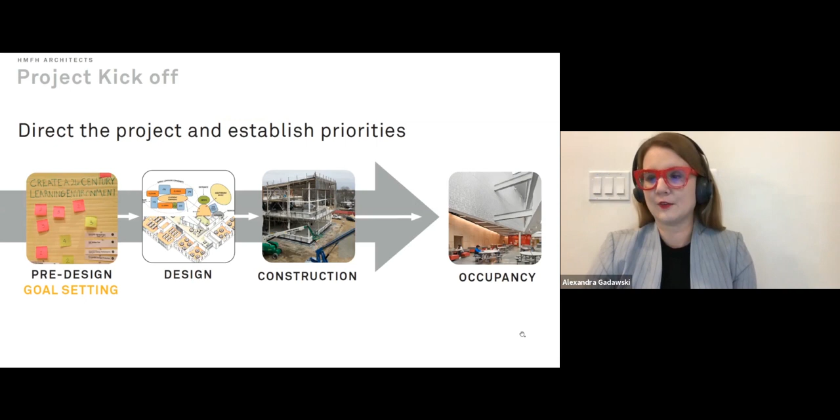So to set the stage for this, I'd like you to think about the materials that go into your building. How many hundreds or even thousands of products come together to make your building? And those could be the things that you really think about from an aesthetic lens, what kind of tile you want, what kind of wall covering, what you want the floor to look like, how do those material decisions play into your visual and aesthetic goals, and also the things that you might not really think about from a design perspective, all those adhesives and sealants and all of those little things. And it's a huge number of products.

And every time you're specifying a product, you have an opportunity to increase the sustainability and material health of your project. And I think that's really exciting. You have thousands and thousands of opportunities on every job to really make a positive impact.

I think it's also worth thinking at this point about who specifies these materials, because coming from the architecture perspective, you think, oh, I'm sort of in charge of most of what goes into the building. You've got the overarching design vision, but if you really think about it, your structural engineer is specifying a huge portion of materials. Someone who's designing the mechanical system, the electrical engineer, fire protection. So there's a huge number of material decisions going on in all disciplines. Just think about the proportion of what's going into the building and how you would really need to have all of your consultants and the whole team on board if you want to make an impact in this area.

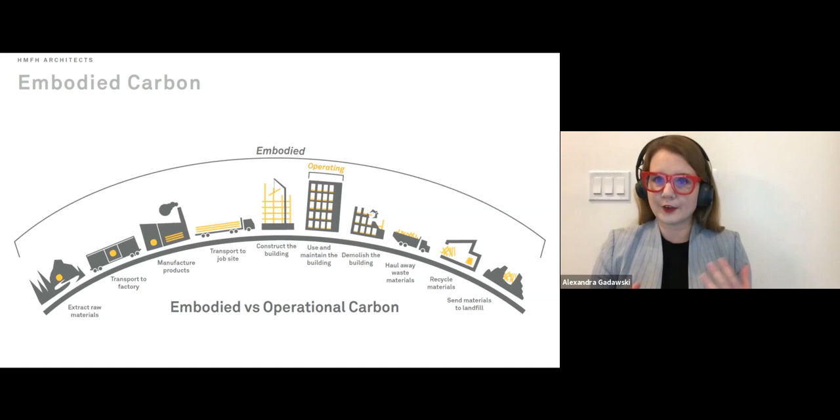This is looking at the greenhouse gas impacts of that whole process. And you often see this number as a CO2 equivalent. And if you're wanting to get more information about this, you're typically going to be looking to an EPD. So if I want to make a decision about lowering the embodied carbon of my building, that's what I'm going to be looking for. And this is a really important component of the overall carbon footprint of your building.

And I think it's important to note the embodied carbon of your building is set when the building is constructed. There's nothing you can do to lower that number over time. Now, your operational carbon, maybe in 10 years, Boston is going to have a completely renewable energy grid, fingers crossed. And our operational carbon will drop, but there's nothing we can do once we've made those material decisions to lower our embodied carbon. So it's really crucial that we're thinking about this early in the project, because moving forward, this is going to be a huge portion of our building's footprint.

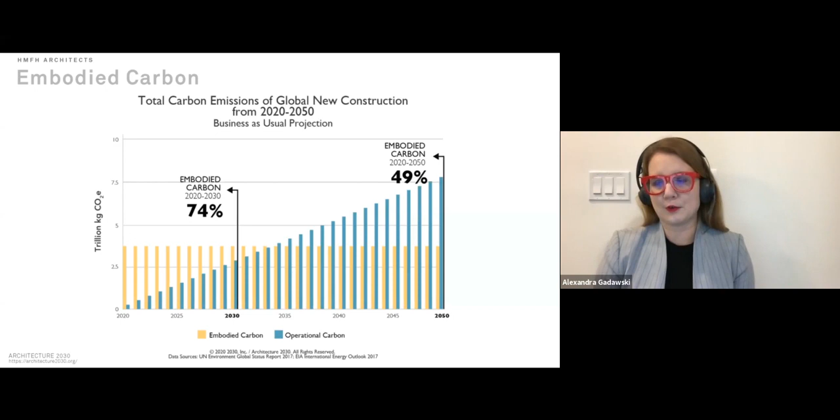So if we work really hard, we make these great material choices, say we reduce our embodied carbon impact by 10% or even 15%, we're still only touching a small portion of that pie. So if we really want to be making a big move, really taking control of the sustainability in our projects, we have to have everyone on board. And I think that's what this really highlights.

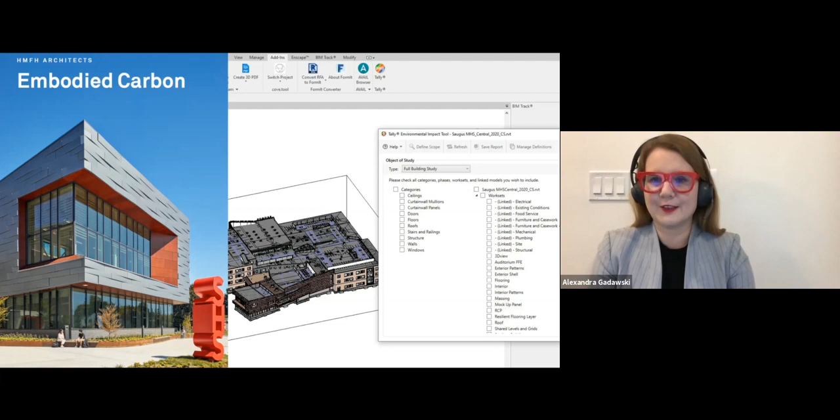So then I wanted to talk about some of the things that we're considering as we're looking at goals around embodied carbon. And those might vary by project, but I'm just going to talk about a couple here. So I think the low-hanging fruit with embodied carbon is simply to use fewer materials. To really think, if you're using, for example, a wood structure, can you design the structure in a way that's inherently beautiful and you don't feel the need to hide it? So leaving that exposed, you're not using additional wall finishes, additional ceiling finishes.

And again, it's something you're going to need to coordinate with your consultants, because if you're removing your finishes, you don't want to have massive ductwork or uncoordinated systems. So that's something that you also want to start talking about early, and a really great way to lower your embodied carbon impact.

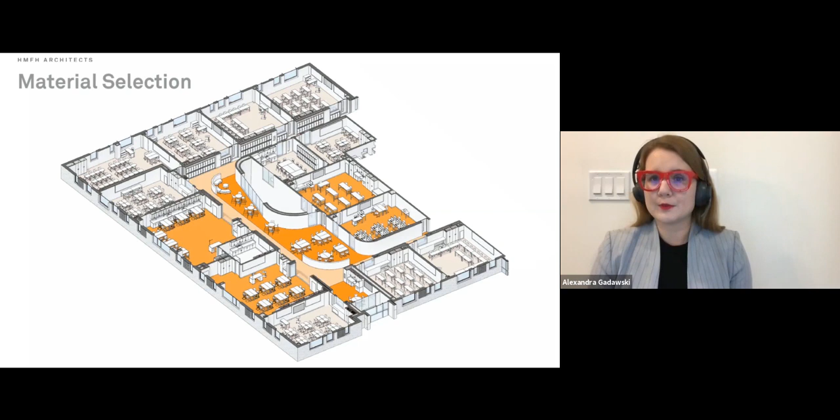So then once we've talked about using fewer materials, we really get into material selection and how we can be picking materials that have lower embodied carbon. So for this, we're really looking for products that have an EPD. Now, just having an EPD doesn't necessarily mean it's a good product. It's just telling you what the product has in it and what its impacts are. So you still need to make an evaluation between different products with EPDs.

We're getting to a point now, particularly on interior finishes, where we have a lot of options, but we're still at a point where we need to push for more transparency so that we can make those evaluations. I primarily work on public works. That means we need to specify 3 equal products. And as you move from the interior into facade systems and exterior components, it can be harder to find that transparency documentation. So that's a big push right now, I think, is really just asking for material transparency so we can evaluate the materials we're selecting and really look at what might have a lower embodied carbon.

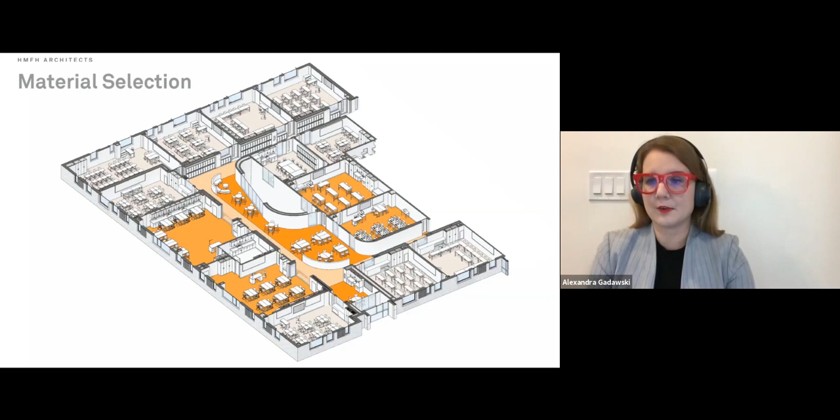Another thing we might think about when we're doing this is looking at where the materials are coming from, not just what they're made of, and what the transportation impacts might be and how that might impact the carbon footprint of our building.

And I think I've found that people are often very excited to be engaged in that. And even if they're not familiar, they're really interested in doing the research. And I think the more information you come to those meetings with, the better. Sometimes you really have to ask the pointed questions to get to the answers that you need. But in the same way that architecture has sort of low-hanging fruit, I think most disciplines do as well. And can you be empowered to go to your lighting designer and say, I really don't want to have PVC in any of our wiring. Here's a list of chemicals of concern that we have. I think also being open to really discipline-specific knowledge.

And when you have people on board earlier in the process, I think there's some things that you can do. If you have this conversation with your mechanical engineer earlier in the design, is there a way that you can, say, locate mechanical rooms so that your duct runs are shorter and you're losing less material? So I want to emphasize how important this is to get everyone involved and how we can't do this just by ourselves in architecture. And then I'm going to pull out structure specifically, because structure is usually a huge component of the embodied carbon footprint. So having those discussions is really important.

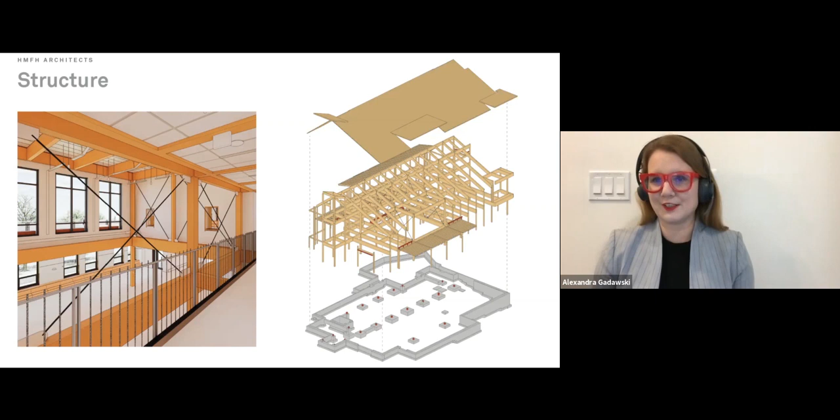So now I'd like to talk a little bit about material health. It's sort of a second level of looking at material transparency. So again, I'd like to talk about some goals that we are looking at with regards to material health. So I think one of the preliminary goals, and one of the things that's really nice to think about, is touch surfaces. So you might say anything 8 feet and down in your building that people are going to be interacting with: doorknobs, benches, wall coverings, carpets. The materials that people are going to be engaging with most directly. What can we really work on to optimize the material health of those things? Because those are high interaction areas. And so that seems like a really good place to start. If you don't have the ability on a specific project to look at every single material, I think this is a good starting place and something we often talk about focusing on.

And I think the second step would be that we'd be looking at all of your interior finishes. The amount of disclosure around interior products has ballooned dramatically over the last 5 years. So even on public projects where we need 3 equals, it's typically possible to get Red List free products for interior finishes. And I would say not only is it possible to do that, you're able to do that without having it impact your design. The level of selection there is there, and I think that's really exciting. So you can choose these healthier materials, and it's not even a design decision. So I think that's really great. As you move to exteriors, if you want that level of disclosure, it is likely going to be a design driver.

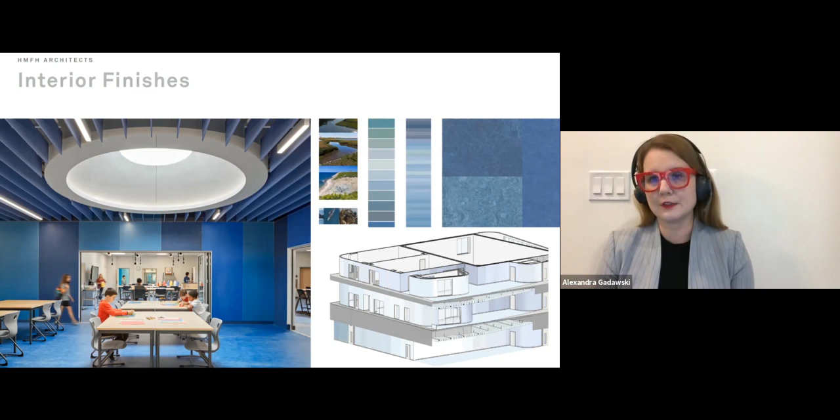And then next, I'd like to talk about opportunities by program. So if you don't have the ability to really focus in on material health in every single aspect of their building, are there specific areas where you might want to narrow your focus?